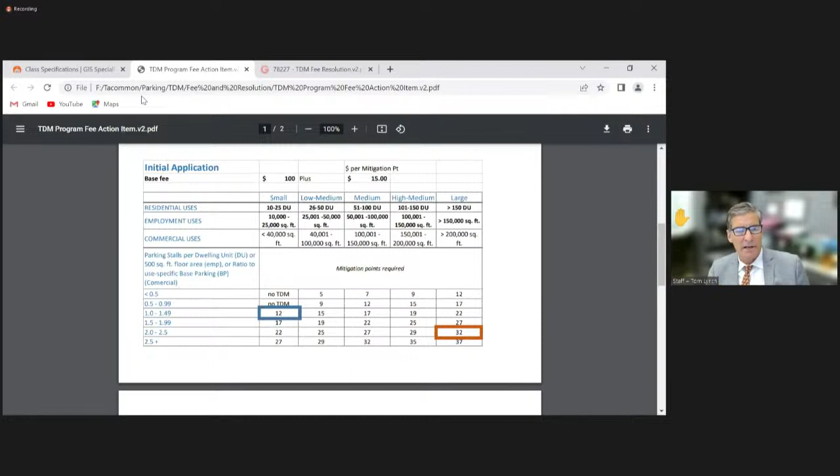Okay, yeah, I think that makes sense. I mean, in the grand scheme of things, that development cost seems relatively modest to begin with, so we don't have to worry about that level of detail. Thanks for answering that.

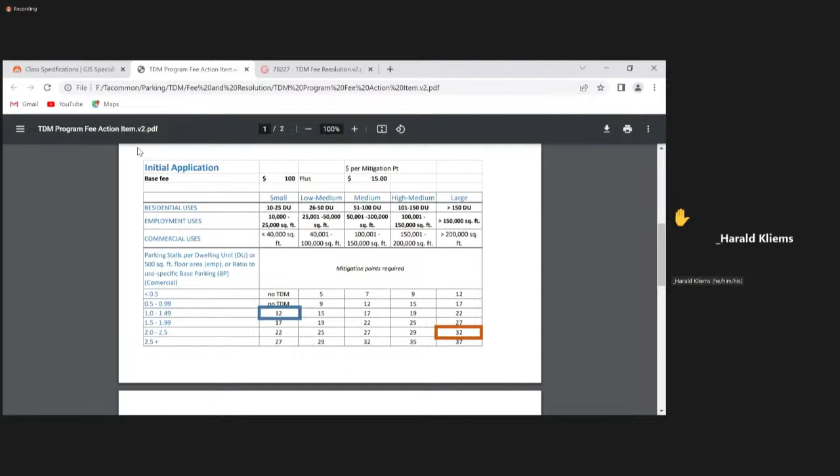And I should note, our goal is to review the fees after a year and see where they line up, so we can make adjustments as needed. Because this is a brand new program, so we're not sure what the first year will look like. So we want that ability to make adjustments on it.

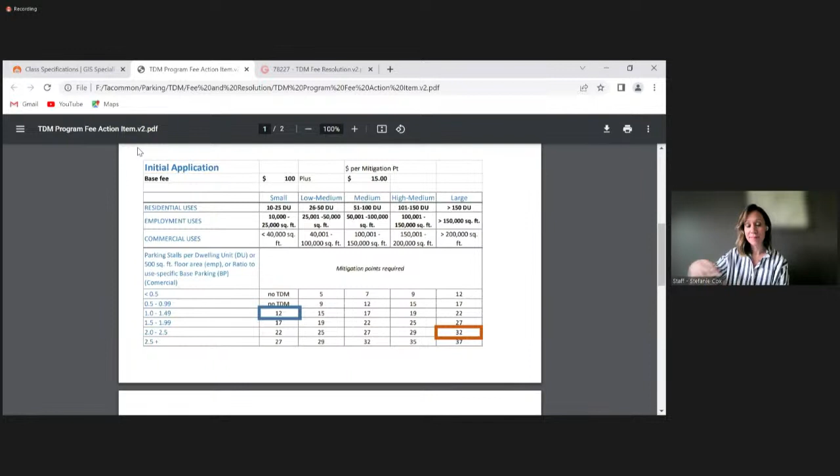Okay, and since those fees can be adjusted and approved just by the Transportation Commission, that process should be fairly streamlined, Stephanie. So, other comments or questions for Stephanie?

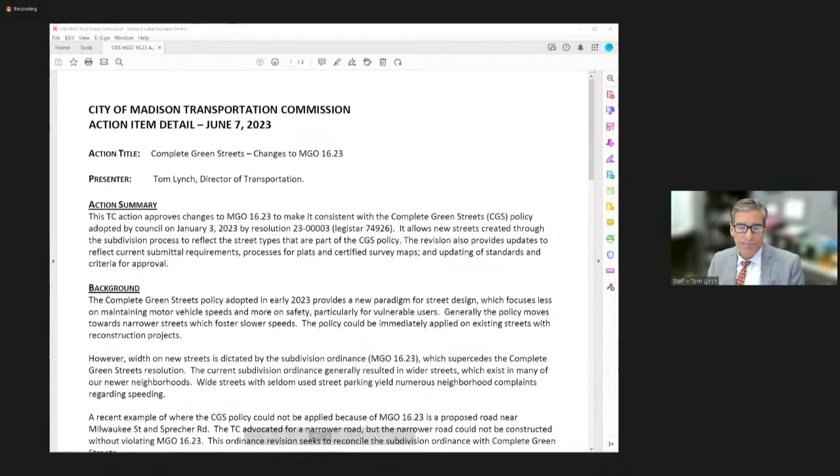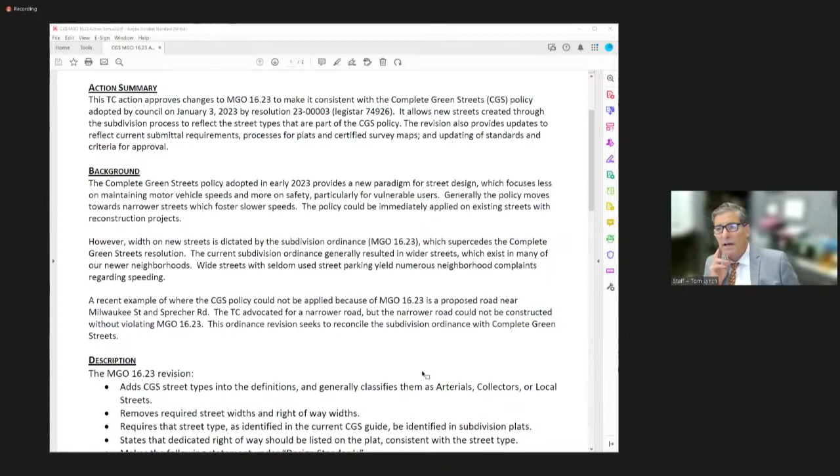And we said that this year we would deal with MGO 16.23. If you remember, just a couple meetings ago, the Transportation Commission was reviewing the geometry for a street just off of Milwaukee Street, east of the interchange. And the Transportation Commission wanted a narrower typical section from face of curb to face of curb. Yet legally, that condition couldn't have been imposed, because our subdivision ordinance is very prescriptive, saying if your right of way is a certain width, then your face of curb to face of curb dimension has to be a certain width.

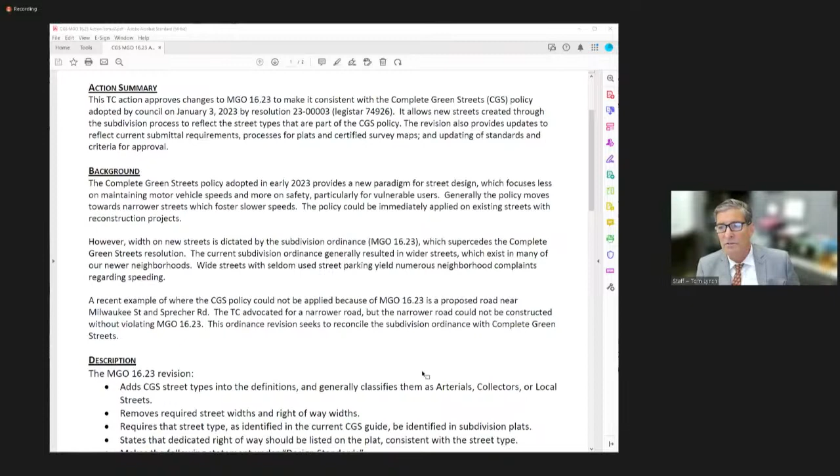Over the years, that's led to streets that are kind of almost broken when they open, because they're so wide they just encourage quite a bit of speeding.

So if we're to summarize, the 50-page revision that's being done adds the complete green street street types and the definitions, and helps classify them as arterials, collectors, or local streets, which was needed to be consistent with some of the state requirements that we have.

It removed the required street widths and right-of-way widths. It requires that the street type as identified in the current Complete Green Streets Guide be identified in the subdivision plat. It states that the dedicated right-of-way should be listed on the plat consistent with the street type. But note that if they dedicate, let's say 100 feet, that does not mandate that they put in a 50-foot face of curb to face of curb. That is left up to the typology associated in our policy.

Under the design standards, these two paragraphs are probably the most pertinent. It says complete green streets: the most current Complete Green Streets Guide shall be used to develop street type, width, and allocation of space between transportation modes. The tables guide shall be used to develop typical sections, travel way width, and total right-of-way width. For any subdivision or land division that proposes to deviate from the design standards in the guide, the Plan Commission shall consider the recommendations of the Transportation Commission before taking action. I think the state statute gives the Plan Commission final authority, so we couldn't make the Transportation Commission have final authority per se, but this codifies that they're supposed to consider what the Transportation Commission says.

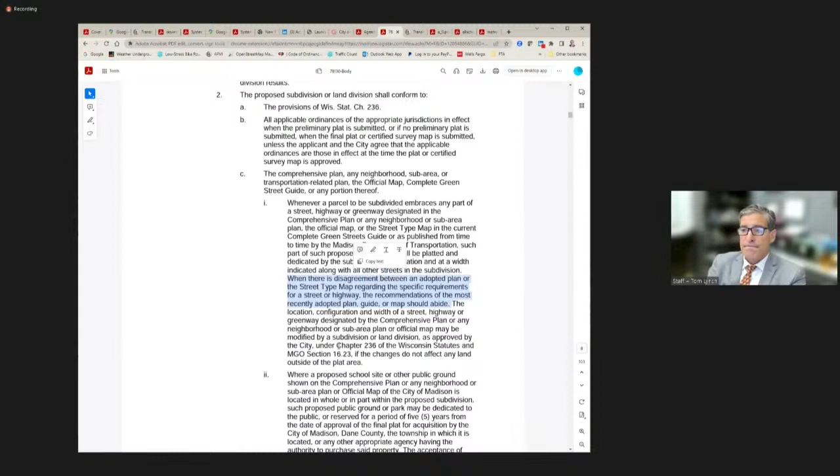So on the other hand, we have a lot of special area plans that this is superseding, right? And so now this is an overlay on top of them saying, no, you have to kind of fit into one of these categories. Okay, that makes sense. Thanks for confirming what I thought was the case.

Can I just throw something out there? Sure. Tom, what you had in your memo, the two places where the Transportation Commission would weigh in: one to offer information to the Plan Commission, and the other where just TC approval is required. So if there's a variance from complete green streets, the TC would need to get involved. So there's like a backstop.

And if it's a situation like you described and something needs to be adjusted, TC is the group that's authorized to make changes to the complete green streets guide. So it should all circle around, and TC would need to get involved, and then the discussion could occur, and it may end up resulting in a change to the complete green streets guide. So I think, Tom, this sort of ties it together, doesn't it? Yeah, we hope so. And we hope that we keep everything current, right?

But just to provide an example, Madison in Motion—when was the last time anyone looked at Madison in Motion? That's 5 years old, and yet it's still currently our transportation plan. So we don't want this to be like that, but I'm giving an example of how sometimes we forget that we did plans 4 or 5 years ago.

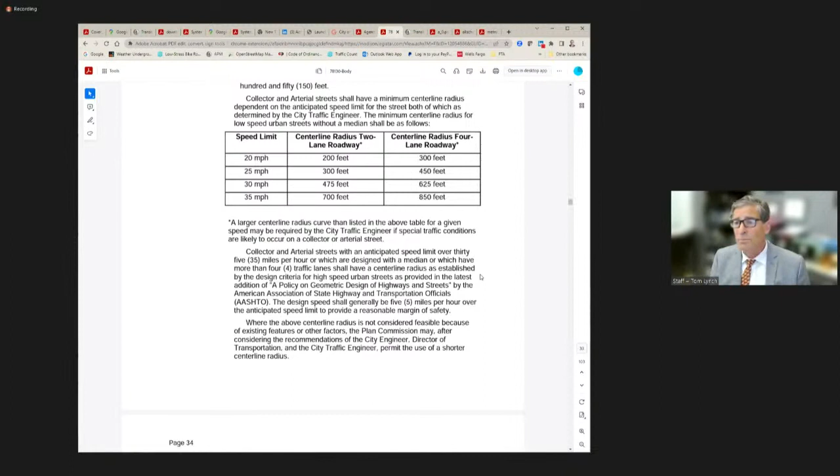For me, the question is, why are we designing for 35 miles an hour when we could be designing for 25 miles an hour? I'm kind of more in that category. Yeah, I don't... I can't think of an arterial that we would design with a speed limit over 35 miles an hour. But there could be different people sitting in different chairs 10 years from now, so I can understand your point.

It looks like Yang might have a comment there, Tom. Go ahead, Yang. Yeah, I just want to second Tom on some of the comments. I think traditionally engineers are trained to design typically 5, sometimes even 10 miles over the posted speed limit. The idea is that people are going to drive a little bit faster, so you need to design a facility that's accommodating and forgiving when people drive faster. But I think some of us are thinking differently now, whether that actually achieves the safety results that's intended.

When you design something that's a bit faster than the posted speed, people actually drive faster, and people may actually run into more issues. There's some debate going on, but from what I've seen on some of our streets, I'm leaning towards this: if we post 25 miles per hour, we should design the facility at 25 miles per hour, so we can make things as tight as possible, so people actually drive slower. There might be situations that warrant the previous practice, or a common industry practice, but I think in the vast majority of cases I've seen, I really see the benefits of designing at a lower speed, so we can realize many other benefits. Those benefits outweigh being forgiving to someone who happens to drive faster. That's just my thoughts on that.

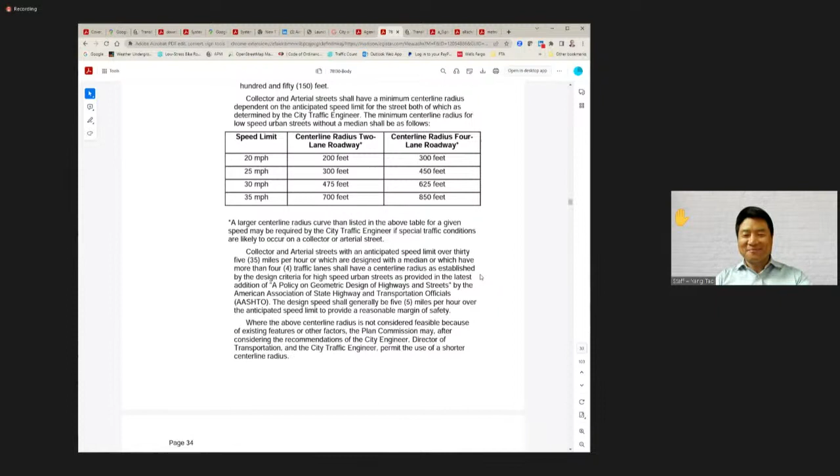That's a great question. All right, thanks. That's all I had in terms of questions.

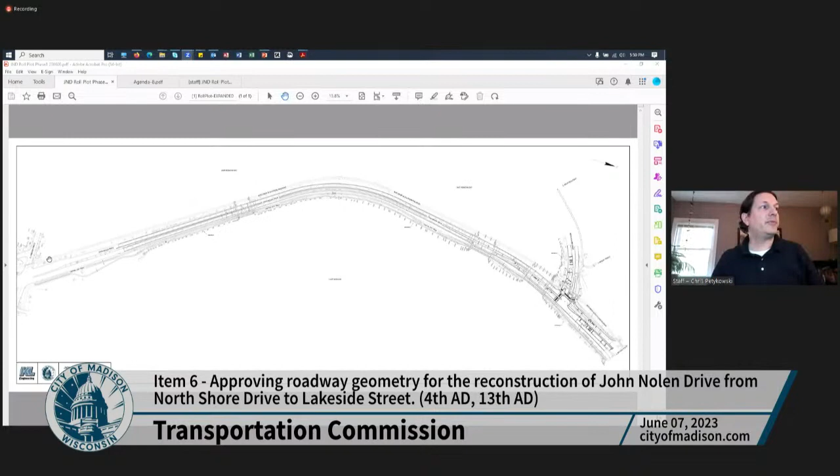So the project again is from just shy of Lakeside Street through the North Shore Drive intersection. It includes the 6 bridges on the causeway as well as the pavement on the causeway. Our cross section is...

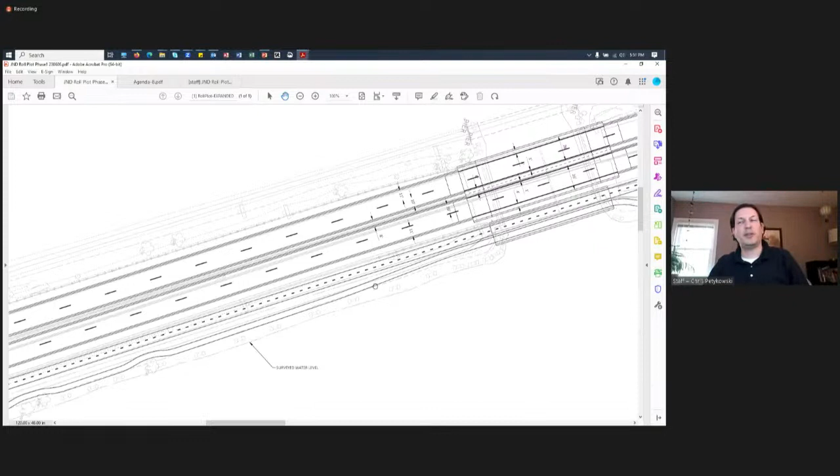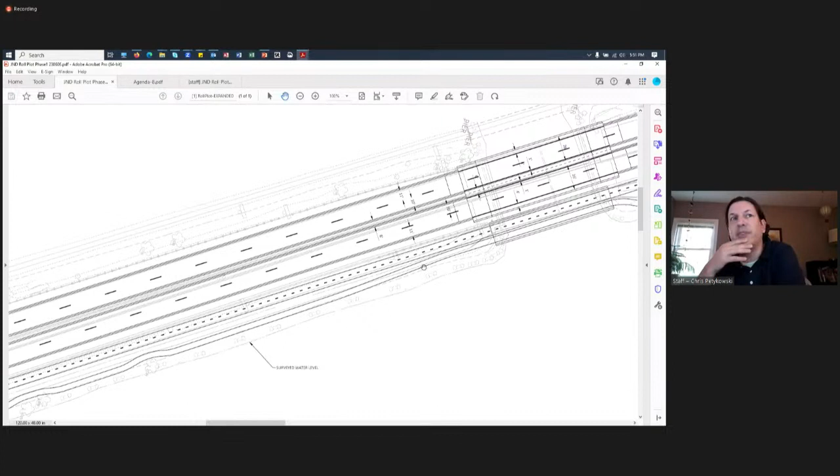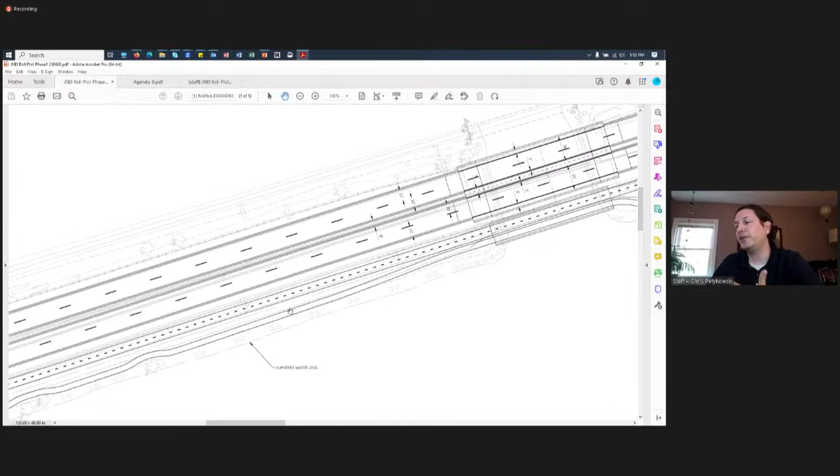We tightened the cross section and pushed it towards the railroad to provide more space for the ped and bike facilities and the future waterfront master plan efforts. It includes 1 11-foot lane, 1 10-foot lane, curb and gutter on both sides, a curbed median 8 feet wide, again two 10 and 11-foot lanes, and then our 10-foot multi-use path and 6-foot pedestrian path. In general, we aligned the bike path to be more straight and parallel to the roadway, and in the pedestrian path we suggested some variations with some gentle curves. We fully expect that through coordination with the Lake Monona waterfront plan, that sidewalk facility will probably be tweaked and may potentially be part of their project instead of the road project. So that's to be determined, but our analysis suggested we wanted a separate facility for peds and bikes, and that's where we lined that up.

As far as the bridges go, we continue that geometry across the bridges with the 10-11-foot lane and the median, and we are showing a separated bridge structure which would have parapets similar to the roadway bridge, so we wouldn't have any sight line issues. The parapets would be a normal standard height where bikes, peds, and vehicles could see over, so it wouldn't be a truss structure.

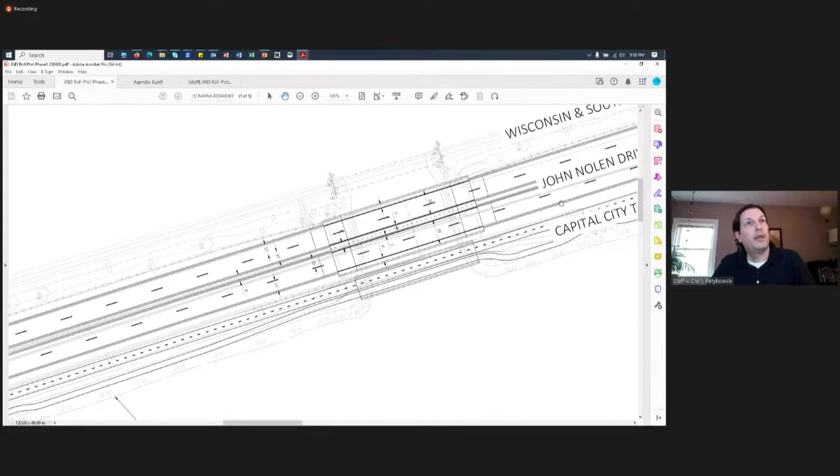That cross section continues throughout the causeway and the two other bridge sections. I'll just zoom through those.

One of the things that was tweaked since the agenda was posted was we made the island bigger, based on the feedback from the committee that folks were preferring alt two, but want to make sure the island's done correctly and effectively.

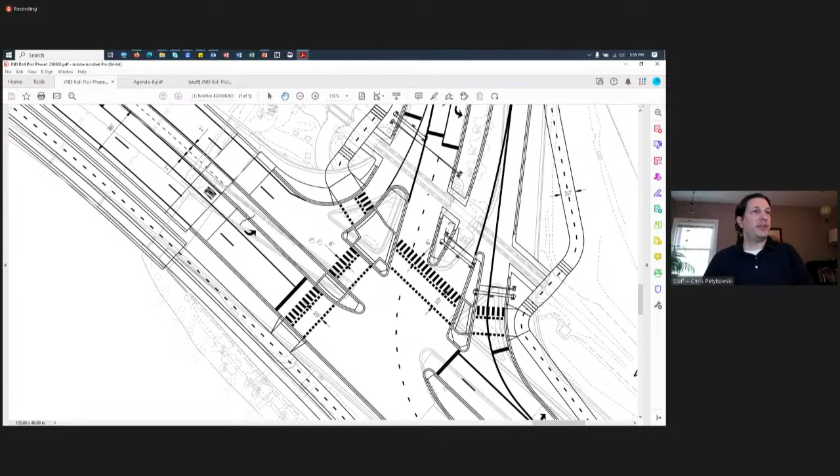Since the agenda was posted, we did change this 11-foot left turn lane to a 10-foot left turn lane to tighten that up. And then North Shore Drive currently has 12-foot lanes, and we are rebuilding the approaches. We changed that to 11s.

I think in our final design, we still want to try to see if we can make this island bigger. But again, we're proposing this kind of configuration, and we can still make some minor tweaks to the final design.

An important piece of this puzzle is the inclusion of this new path on, I'll say, the west side of North Shore, or west and north side of West North Shore and John Nolen. This is a path that does not exist currently today, and we're showing it extending to Broom Street where the sidewalk ends there, and up to the Bassett Street Railroad crossing, and then down to Bedford Street.

I also just wanted to point out that we now have all the community survey information posted on the website. A lot of that was kind of discussed before. In most cases, the community survey and the staff recommendations align, with the exception of that Alt4, Alt2.

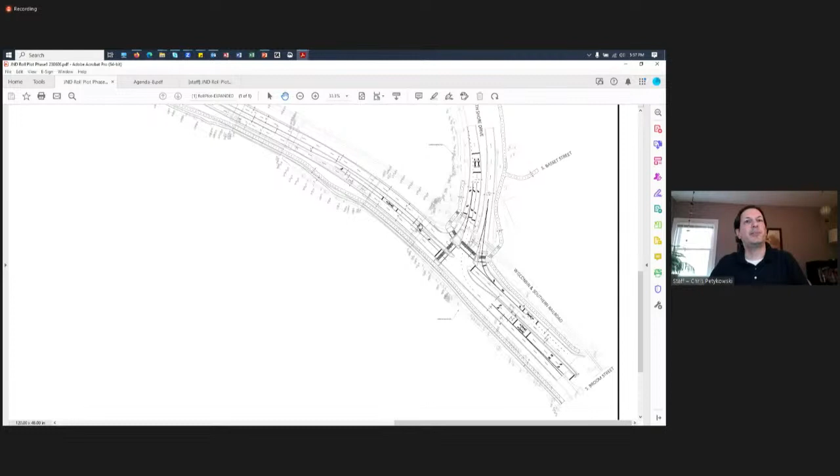And then we also have the small group focus group results on the website as well, and those all similarly seem to align with the staff recommendations as well. So I know we've talked about this a lot, so I will probably stop at this point and then ask if folks have questions.

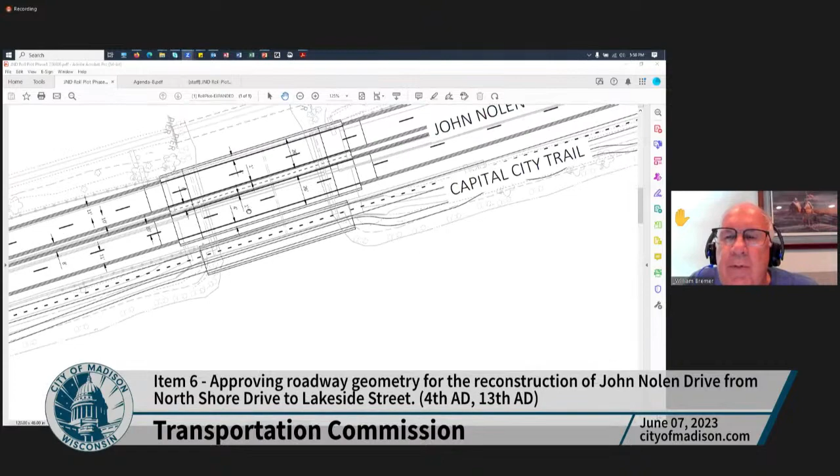Bill, go ahead. Thanks, Chris, could you show the bridges again, the cross section of the bridges? You bet. Did I see, is it 26 feet with the 11 and 10 lanes? Yeah, is that right? Yeah.

So then the remainder is buffer space between the little shoulder space. Yeah, for the bridge rail. Yeah. I don't want to call it a shoulder, I call it a buffer. Okay, yeah, shoulder space.

Yeah, so that is below the recommendation for, I believe we were requesting, by doing this, we're requesting WisDOT to take 3 feet out of each side of the shoulder, or 3 or 4 feet, to tighten that cross section up. And that will definitely slow traffic down. I think that'll be one of the points where traffic will, the narrowing of the bridges. Yeah, okay.

I just wanted to make sure you had what you had for a buffer. Sure, that's good. Great, thank you. Okay, thanks, Bill. Darren, go ahead.

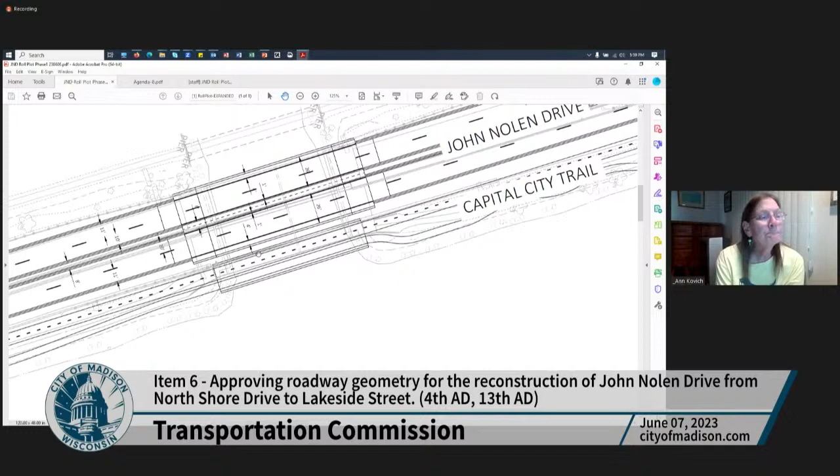Yeah, thanks, Ann. Chris, going back to North Shore Drive and that intersection there, you mentioned that you took the travel lanes down from 12 feet to 11 feet. Is there a reason why you couldn't take them to 10? We could probably do maybe a 10 and 11. We do have to keep 11 for this, since this is state highway 151 for the trucks, but we could consider maybe a 10 and 11. Yep, I'm just always a fan of the narrowest lanes we can possibly get, just to help slow traffic down. Yep, let me write that down.

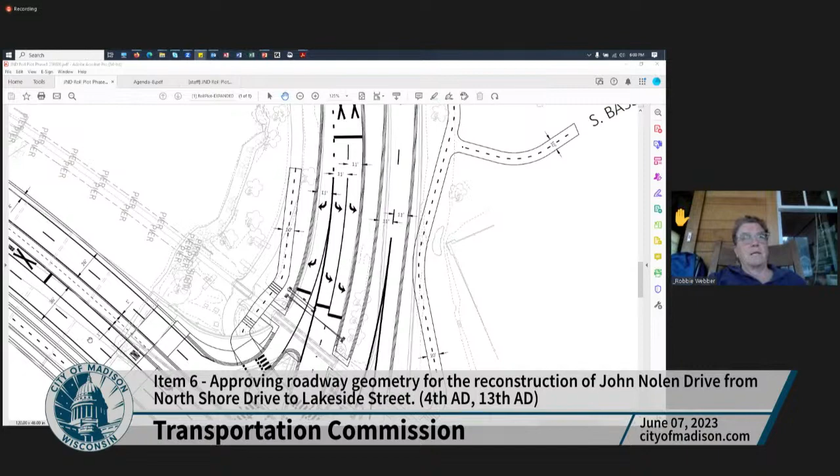Yeah, so I have a couple questions. First of all, the 10-foot path that runs parallel to John Nolen, is that as wide as we can get that path? I know we're going to have a separate pedestrian path, but with the volume of traffic, that seems like the bare minimum, I guess I would say. So I'm wondering, maybe our paths are standard 10 feet, but it just seems with the volume of traffic we might need a little more space there. If it was possible to get another foot or two.

It certainly is possible. One of our cross sections was like a 14-foot cross section, but we felt by providing that separate space for the pedestrian, and still trying to keep in mind overall reducing our pavement widths in general, having the 10 feet just for the bikes and then 6 feet for the peds could work here. But it could be bigger. Yeah, it's possible, it just takes more green space.

I realize it's a trade-off between green and pavement, but I am just worried that with the number of bicyclists, it certainly doesn't allow people to ride side by side, and even passing maneuvers can be a little tight there. So I'm just kind of throwing it out there. I do realize it's a trade-off, so maybe I can also hear what other people on the committee have to say about that. But I think 10 feet might be kind of squeezing this area. I do have a couple other questions though. So I'll just throw that out, Renee there might want to weigh in on that.

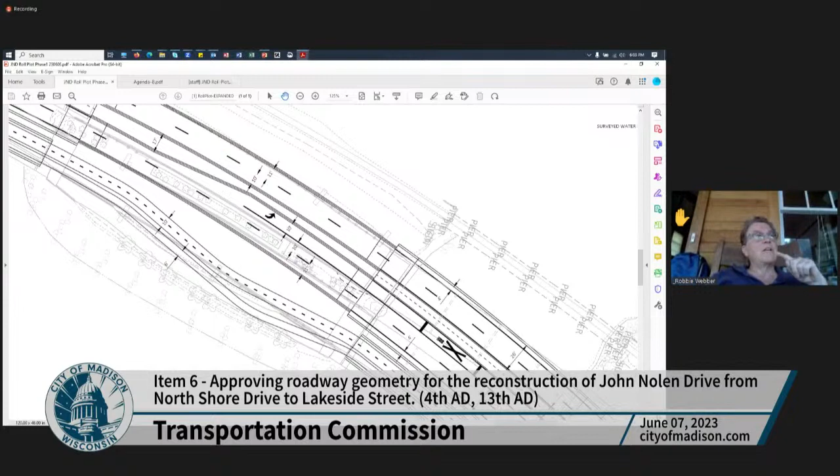Okay, well going back to our favorite intersection at North Shore, I just had a couple of quick questions about that. At the last discussion, did I hear that people coming from Brittingham Park or from the lakeside would be able to make the full transition in one cycle without standing on the island? Ideally the lights will be timed so they'll be able to get all the way across without having to stop on the island?

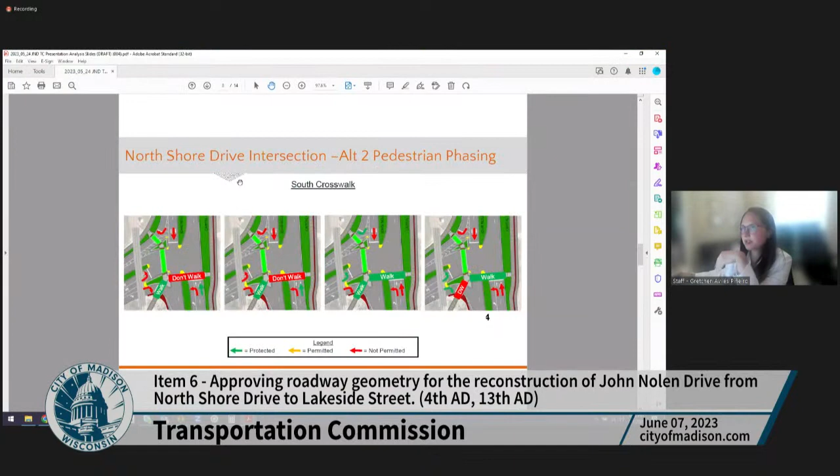Yeah, okay, so this is a sequence of how it would look for pedestrians and people riding bikes crossing from the park to the lake or from the lake to the park. These are the different times during the cycle where pedestrians and bikes would get either a walk or a green for the bikes to move from the corner to the island and from the island to cross John Nolen - this is the south crosswalk. So there are multiple opportunities for making the crossing from the corner, from the park, to that bigger island. And then there is one point during the cycle where both pedestrians and bikes will be able to make that full crossing in just one phase. But yes, we do have multiple opportunities for people to get to and from that pork chop island and to cross back to the corner where the park is or to the lakeside.

So we have the opportunity for people to get into the islands, and then they would be able to make that crossing across North Shore, and then again be able to get out of the islands. Later in the cycle, we should be able to provide opportunity for people if they got stuck on the island and weren't able to get out, or if they're in the corner and want to move to the island. So there will be multiple opportunities.

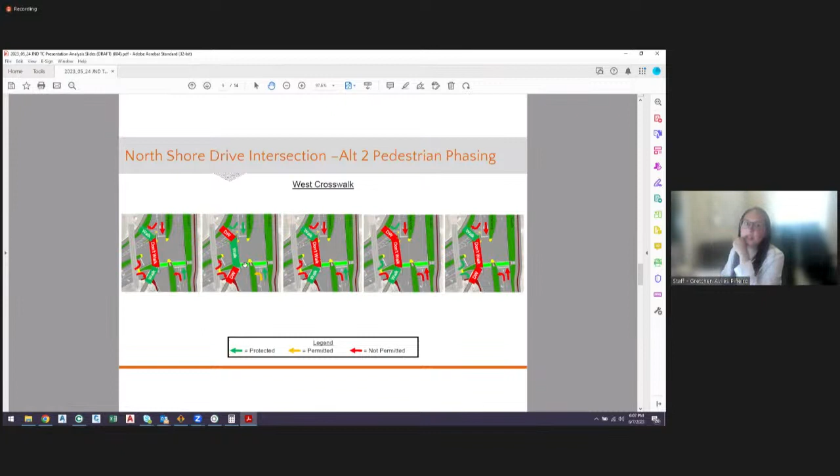It won't be a long time, but the timing—for example, here the walk is green, so you would go to the island and then be able to cross North Shore. The time that walk is going to be on is longer than what it will take you to get across there. So there will be some waiting at the island before you'll be able to get another green or a walk to complete that crossing and get to the other side.

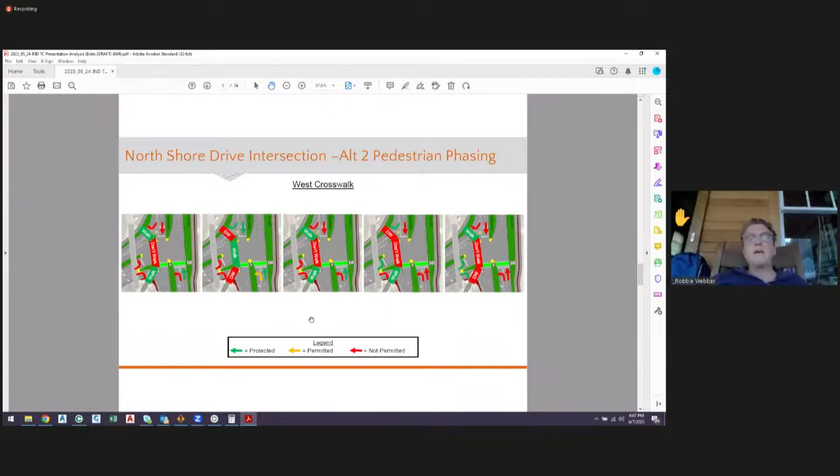Okay, so I don't know whether this West Crosswalk is going to get as much traffic as the one coming from Brittingham, but my concern is that the cycles are going to be fairly long, and I'm wondering how long out of that long cycle will be the time when you can get all the way across without stopping on the island.

Right. So currently the longest full cycle we have is 110 seconds—almost 2 minutes. And if I did some timing to see adjusting it to what the future would be, but still maintaining that full cycle, because we still have to coordinate with Broom that's really close by.

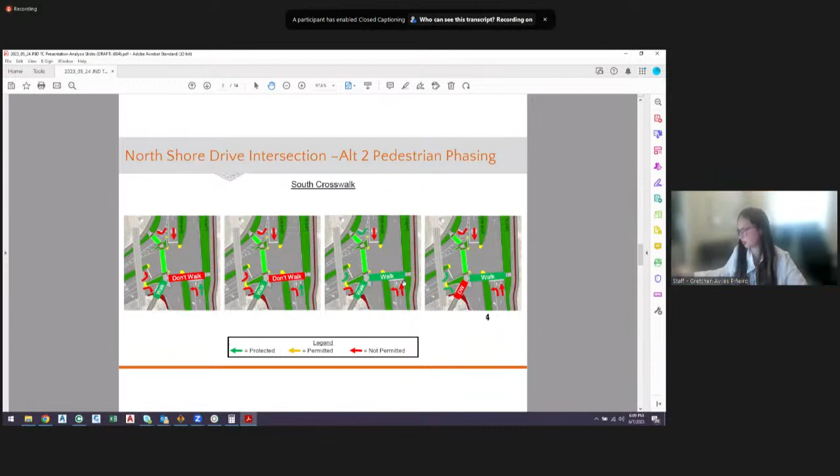Here in the south crosswalk, I would say that this walk right here, you wouldn't be waiting much. I'm interested in the third panel—that one, this one right here. Yes. Okay, so this one should be pretty good and easy to make this crossing. So this is the south crosswalk.

That's not my question. My question is, out of that 110 seconds, how long is it that you will be able to get a full walk both directions across? Got it. Okay, so we have here, they have it as phase 7.

So that is crossing 2 and 1 green, the full—so it would be at least 36 seconds. It should be enough easily for a bike to be able to get across. And for the pedestrians right here...

I think, according to the timing that they have, it would be phase 7 and 4, and I'm just double checking with another file that they have that actually has the timing, so I want to make sure I give you the right information.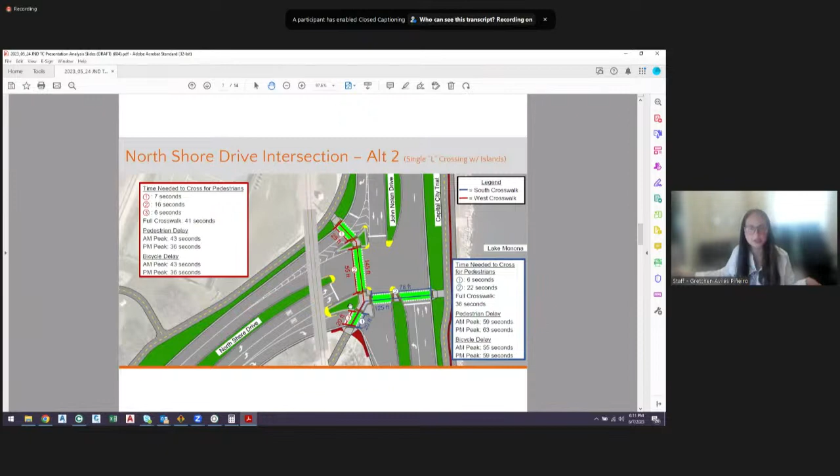And this is... yeah, so if I do this math real quick, yes, it should be about—for that full crossing—about 38 seconds. So it should be enough according to this map that they have right here. It should be enough for a pedestrian to get from one side to the other, in that third quadrant we're showing right here.

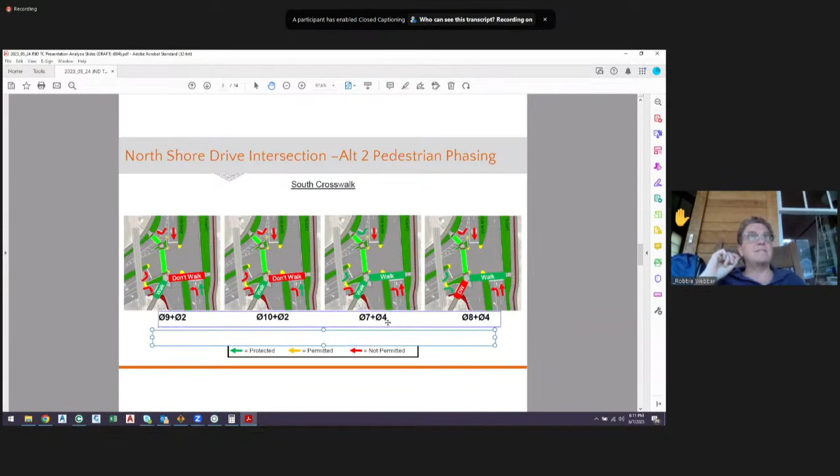Let me explain why I'm asking. My question is not so much whether people are going to be able to make the crossing physically—that's not the issue. The issue is how long people are going to be standing on the island because they don't have a green in both directions. This gets back to the size of the island and the capacity of the island.

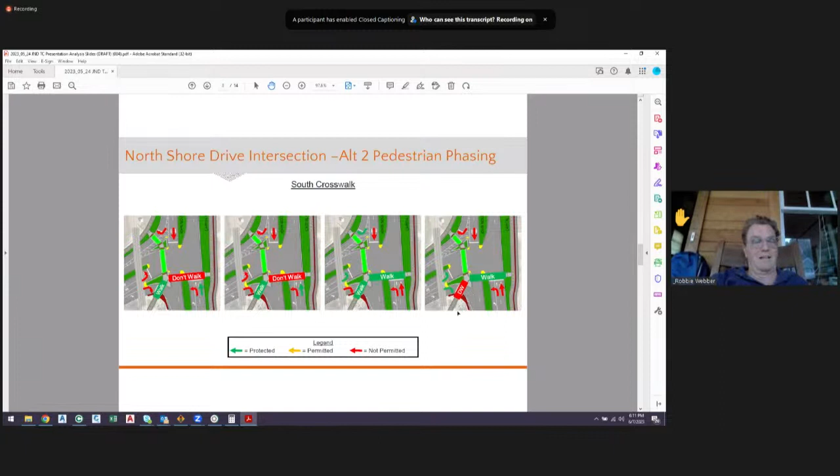Because we are going to be seeing a lot more people biking—we already see a lot of people—and I am concerned about the capacity of the island when people do not have a walk going both directions. That's why I'm asking, out of the whole cycle, how long people are only going to be able to get partway across. Okay, so it's a capacity of the island issue, not a can-you-physically-get-across-once-you-get-a-double-green issue. Yeah, and I see that.

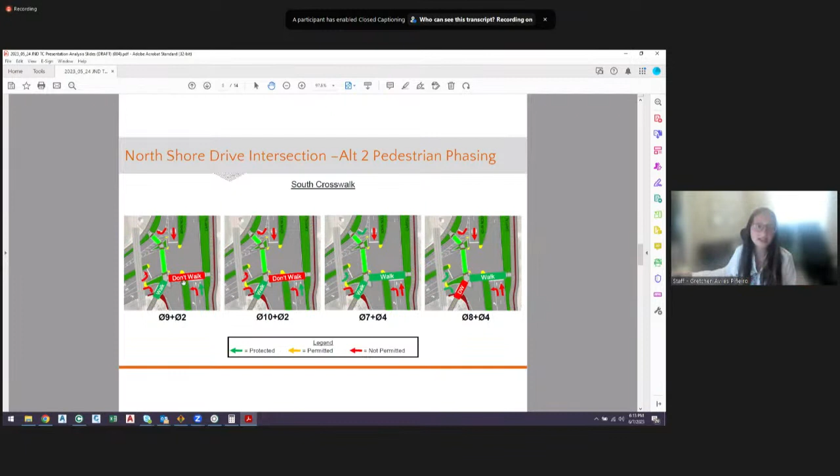That would be an issue since we have so many opportunities for people to get onto the island, opening a gap where more people could crowd the island during more times in the cycle, rather than giving one option to cross with no more options. But the more options we provide to get in and out, we're also providing more time to fill up those islands. That is correct, yes. But I can tell you that I blow right past the island. I don't even get onto it if I can make it coming from the lakeside, because it's too crowded right now. So if I see nobody coming through that slip lane, I'll go around the nose of the island and not even get onto it because there are just too many people.

I'm just bringing this up because when we're rebuilding, I don't want people hanging out in the slip lane or trying to run the stale green because there's no space for them to stand on the island. This gets back to Chris's concerns about the size of the island. I'm just throwing it out there that I think we're still going to have an issue. That's my concern.

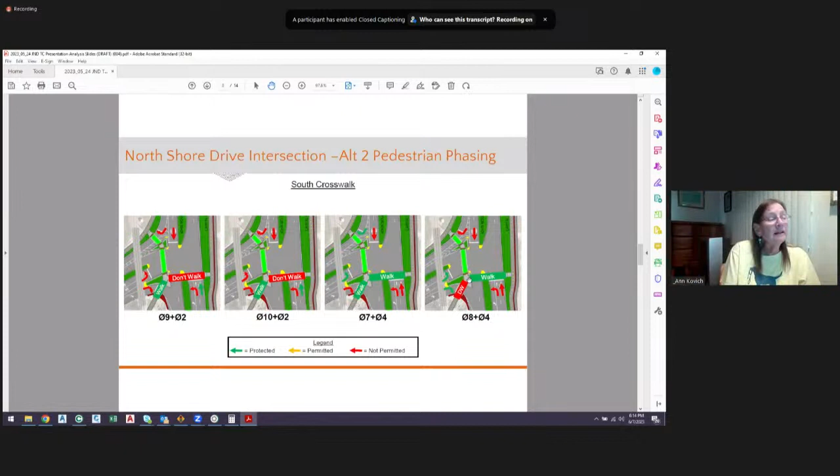Did the increase in the size of the island help that at all, Robbie? Well, any increase in the size of the island is going to help, and yes, the increase we've already seen did help, but it's still too crowded. Especially because this isn't a straight crossing—the Monroe Regent crossing is much more a straight line. When we rebuild this, we're making people make close to a 90-degree turn on the island to get across from Brittingham Park to the lake or the other way around. That means people with larger bikes also need that turning radius, so they'll be taking up space. There's a bunch of people crowding on the island, all trying to get across and in and out of the crosswalk.

I do think expanding the size of the curb cut is going to make a big difference. That's a very good change, because it will give people more space to pass each other. Right now you really can't pass each other in the curb cut, going in opposite directions. So I'm just throwing it out there that I think we may still have some capacity problems for non-motorized transportation in this quadrant. I have one other comment, and then you guys can chat about what I brought up.

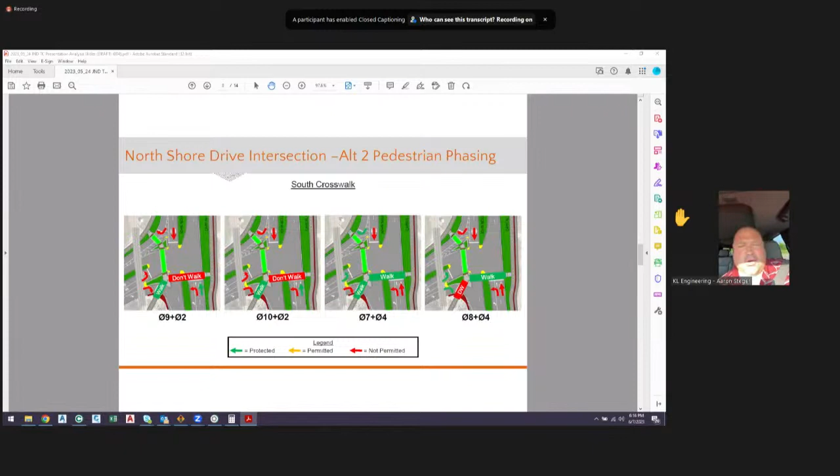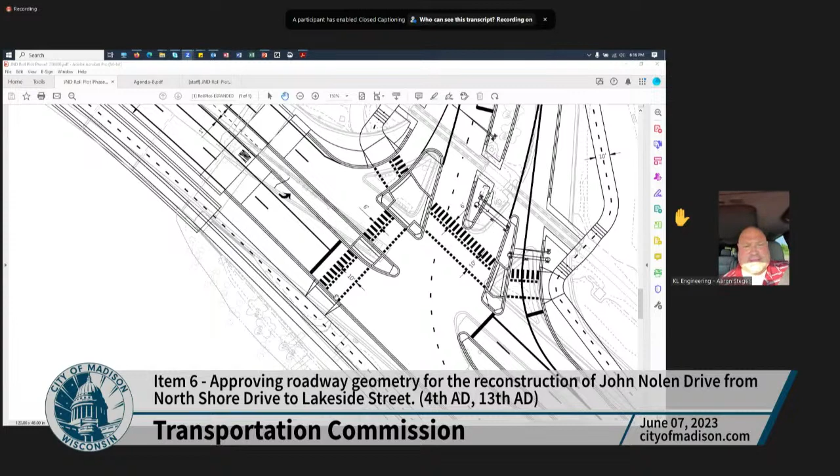It may not be a direct answer, but I think there's one other important factor to consider—it's not only the size of the island, but also the distance across John Nolen Drive. If Chris could pull up the drawing again, you'll notice how much shorter it is to go from one side of the island to the other side of the street. That also makes the crossing much more efficient and safer, because you're no longer in a vehicle pathway. Just to see where the crossing would be today versus how it's proposed—when you make that distance shorter, not as many people will need to stop on the island, because they'll be able to complete that crossing in one maneuver.

The old distance is from these gray lines here, right? And then the newer, shorter stretch is what Aaron's getting at. Okay.

I have trouble figuring out how it's going to work just looking at the geometry—I'm just not able to picture what it's going to feel like. But I'm bringing this up because I think crowding on the approaches, even people turning off the path and waiting to cross at the light, means having a staging area for them on the lakeside as well. We kind of solved that at Blair, but that was a huge issue there too. So we just don't want people waiting in the flow of traffic, whether that's other bicyclists or cars.

Robbie, I see Yang has his hand up. Yang, did you have some comments here? Yeah, thank you, everyone. I think this is a very good discussion.

We already have been discussing that we should maximize the curb cut as much as possible, even looking to increase that further to maximize the usable space in that area.

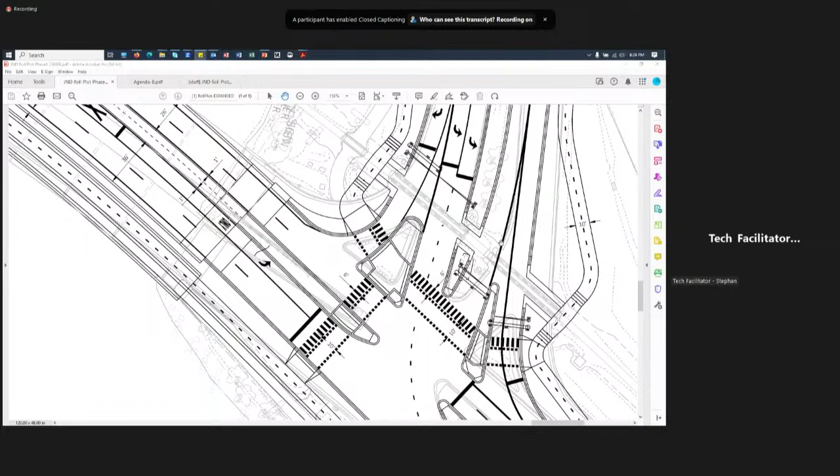Thanks, Ann. Robbie's questions on the light timing just got me thinking. In planning out the timing of the light, what consideration is given to people who move slower than a typical able-bodied 35-year-old, whether slower on their own feet or slower because they're rolling with a mobility device of some type? It's from recent experience I had in La Crosse on Rose Street, getting caught in traffic with somebody on a scooter and a power wheelchair, which made me realize how much slower they move. As our population is getting older, this is going to be a spot enjoyed by many, not just people on bicycles or younger people who can move 2 to 3 miles an hour walking. What consideration is given to crossing for the slower movement of people?

Who wants to take that one? I can start. Normally what we use is 3.5 feet per second to calculate how much time we need. But we do know that there are certain areas and locations, and sometimes we just know from feedback from the public where more time is needed for certain crossings. So we definitely take a look at that, and also when we're evaluating crossings for schools, especially for the crossing guard studies, we use a lower speed. So there are certain locations and applications where we use a different speed to calculate how much time is needed. I don't know if Renee wants to add anything to that.

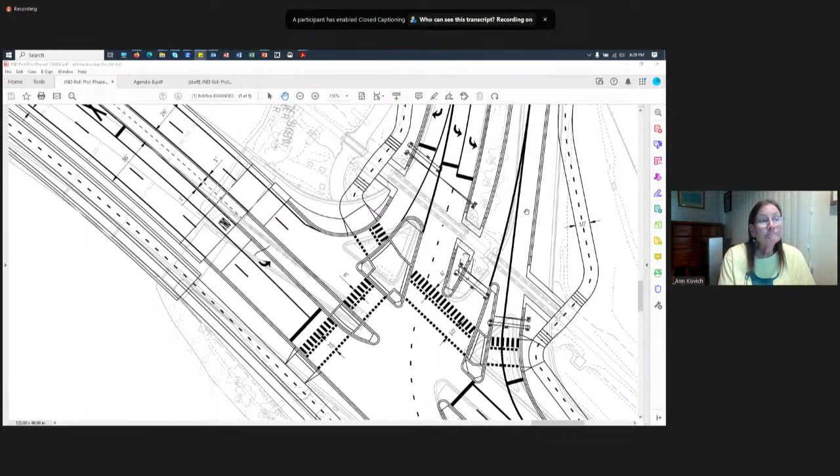Chris? Yeah, I think, as I mentioned last time, staff saw the pros and cons of both options, and we were okay with both options. We could move forward with both options. But given the full scope of all the considerations, if we had to choose one, we would have chosen alt 2, and I still believe that's true.

Okay. And is that true for everybody on the call? I don't know, people should feel free to speak up or not. I guess I'm genuinely wondering.

Okay, is that all you had, Harald, before we ask other folks their thoughts? I have a couple additional things. Sure, go ahead.

So the staging area on the south side of the John Nolen Drive crossing, I think we need to figure out a way to make that bigger, to have more space, because it's going to be wider, which helps to some extent. I still think with a 90-degree angle, you have a lot of space that's actually not useful. So thinking about how we can make it so people waiting for the light do not block the path or have enough space there. That's just a minor thing we can probably sort out.

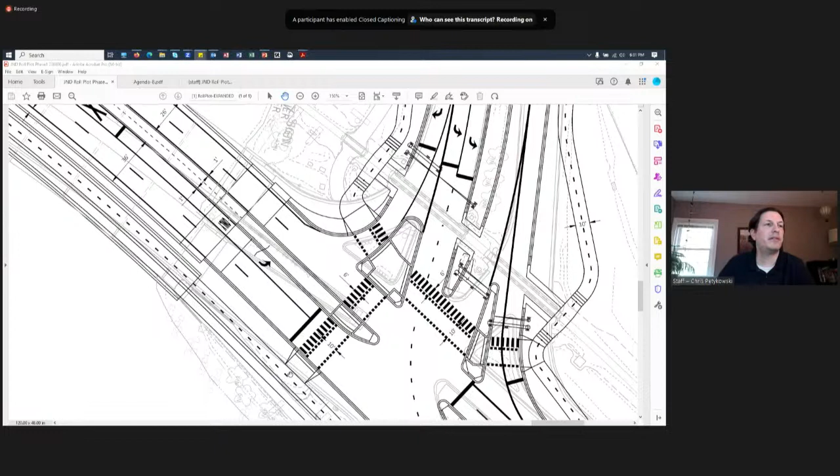I noticed that compared to... did somebody want to respond? I was just going to say, yep, that's on our to-do list. I think we'll bow this out a little bit, make a little more space between the path and the crossing, as well as widen some additional storage space on each side. Right, because people from the walkway also need to get across that crossing, and right now you have that little buffer in between, so maybe that's where the two join. Yeah, I think that sounds good.

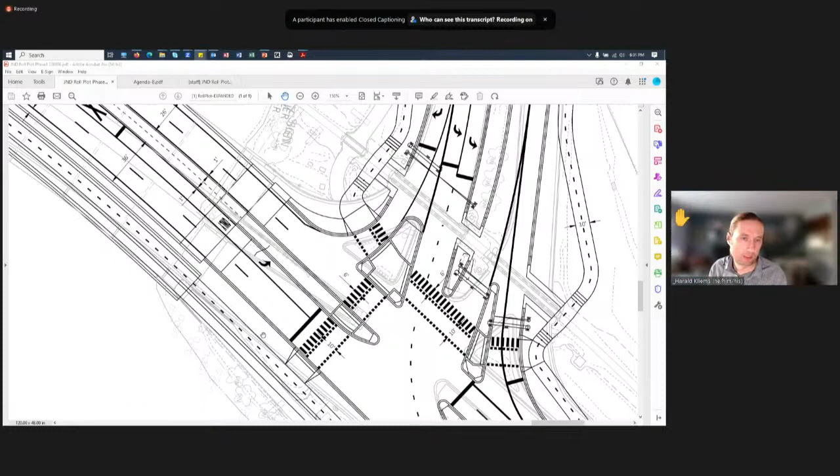We had a discussion about the width of the path along the causeway. I get the conflicts with trees and other things. I looked at NACTO guidance for two-way cycle track, which I guess this is not exactly, but I think it is in a way. They say recommended is 12 feet, which sounds better than 10 for me, and this may still be narrow enough to allow all the other things. I know in the master plan process, noise was a big concern, so having the ability to get trees in there and maintaining the distance between cars and people walking and biking, I think that's good.

So finding that balance is good, but 10 feet is what it is right now, and it does not allow people to ride side by side. It creates conflicts between people riding at different speeds, even when nobody's walking. Pedestrian traffic is often not very heavy, but it still seems too narrow. Since we're not going to be able to change that in the next 50 years, most likely, erring toward 12 feet seems better.

One difference I noted between what you presented last time and this drawing: it seems like you made the path approaches along North Shore Drive across the railroad tracks at 90 degrees, where previously they were going through at an angle. I think the downside, especially on the upper left corner, is that you now have that 90-degree bend in the turn right after the ramp to the crosswalk. Yeah, right there.

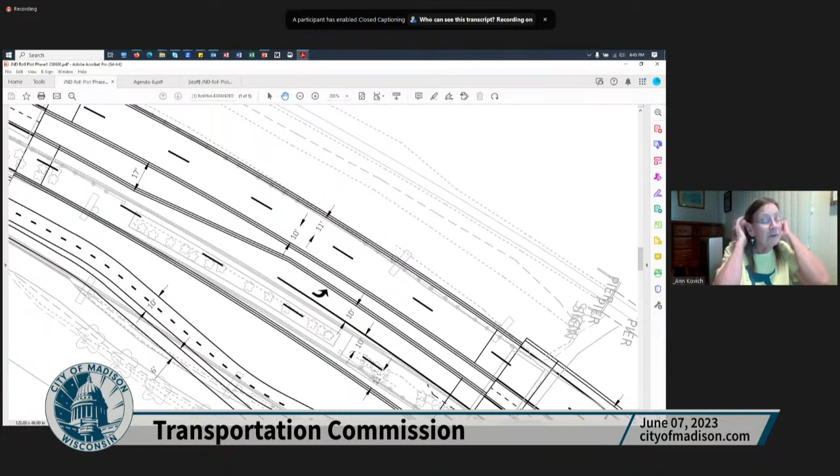Okay, you want to start that motion over? Sure. Well, I just want to make sure that we're all on the same page, because it sounds like we were on a little bit of a different page in terms of the width of the car lanes. Yeah, I withdraw that. Let me make another attempt. Okay.

So I will move approval of the geometrics as presented, with the recommendation that the bicycle portion of the path along John Nolen be widened. Okay, I'll just leave it at that, and then if we can get a second, I can discuss the other possible amendments.

Is there a second for that motion, for discussion? Darrin, is that a second? I second the motion. Okay.

So if I can speak to it, I know that there was some question about the 90-degree turn just before the path crosses the railroad track in the North Shore intersection. And if someone wishes to suggest that be straightened out, I know that Harald was concerned about that. We can add that as a friendly amendment to the motion. But if everyone is happy with the answer they got, then we'll just leave it the way it is. So I will put my motion out there, and then if people want to make an amendment, we can do that.

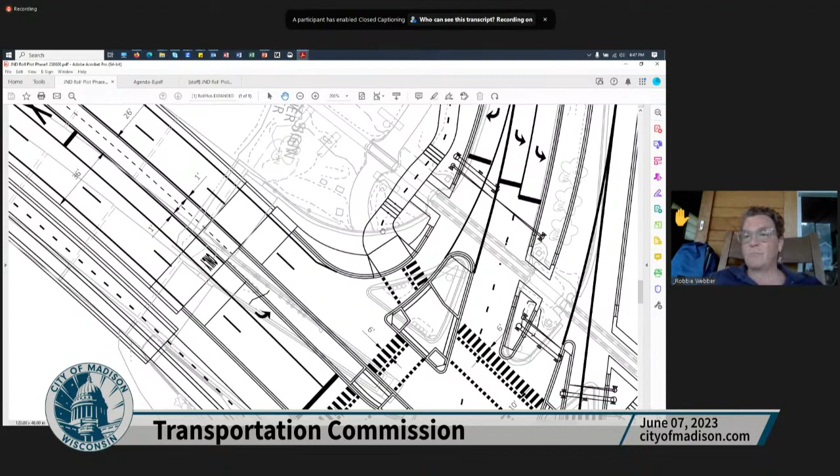Okay, what I have is Robbie moved approval of the geometrics as presented, with the recommendation that the bicycle portion of the path along John Nolen be widened. So, Chris, that gives you some flexibility in terms of how much wider. Did you wish to speak any more to the motion, Robbie? Not at this time. Okay.

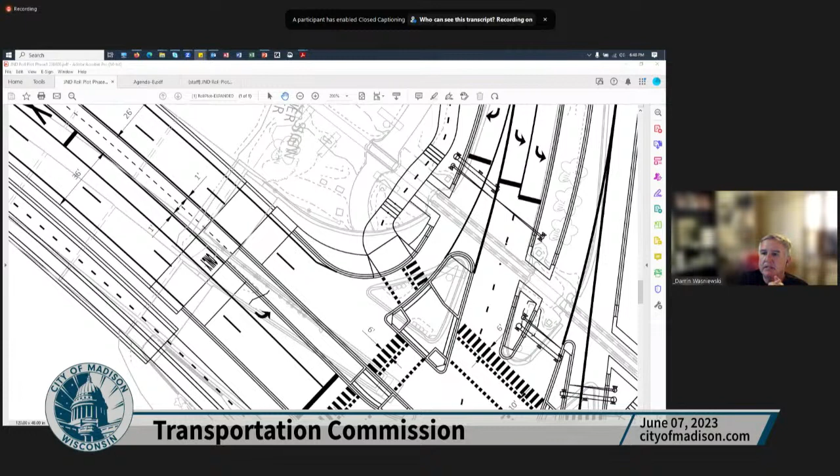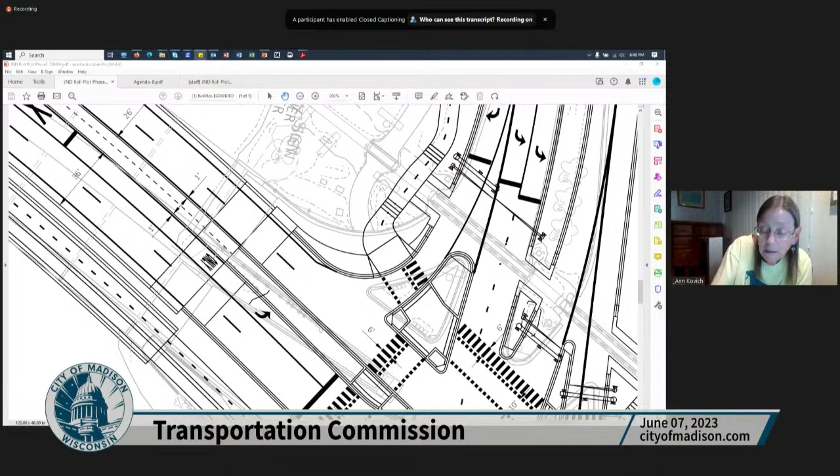All right, Darrin, go ahead. Yeah, I guess I was just hoping maybe to amend the motion to include what Robbie said, and then to add exploring narrowing the one lane on North Shore to 10 feet, if applicable. That would be friendly. So reducing the width of the car lane on, help me, Chris. It would be to have 10 and 11-foot lanes on North Shore Drive. Perfect.

Okay, just a second. So we would add having 10 and 11-foot width car lanes on North Shore Drive. Is that right? Yes. Okay, and Darrin, I think you also wanted to help straighten out that path. I don't know. Straighten out. So that would be like straighten out the path in south. Well, hang on a sec. Darrin, did you want to do that? I thought you just wanted to widen the car widths. Did you want to also straighten out the path, Darrin?

I was just concentrating on the car width, but we can explore. I know we had conversation, I think it was Harald who talked about straighten it out, but let me repeat where I think we are at the moment, and then we'll see where we go from there.

Move approval of the geometrics as presented with the recommendation that the bicycle portion of the path along John Nolen Drive be widened, and recommend 10 and 11-foot width of the car lanes on North Shore Drive.

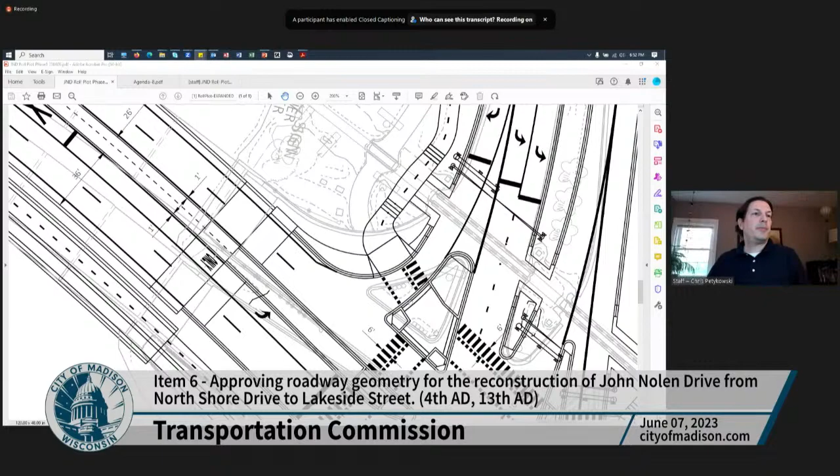I know we talked about this one. Are you thinking something along the same lines on the other side, or was it? Yes, it was plural, so I was assuming both sides. Is that right, Harold? That is correct.

One I think is more important than the other, but there doesn't seem to be... Gotcha. Okay, I'm going to read it back and see where we're at.

Move approval of the geometrics as presented with the recommendation that the bicycle portion of the path along John Nolen Drive be widened, and recommend 10 and 11-foot car lanes on North Shore Drive, and recommend that the usable space on the islands be made bigger and the approaches across the railroad tracks be made more straight.

And we're not going to critique grammar at all, we just are going for clarity here. So Robbie, Darren, and Harold, does that reflect everything correctly? And Chris and Gretchen and Yang and Renee and everybody, does that? Okay, I'm with you. Robbie, go ahead.

If I could just say, I think that saying the approaches being straight is not necessarily clear because right now they're 90 degrees, which would seem to be straight. But I think what Harold's trying to get at is that we want the path to be straighter, more direct.

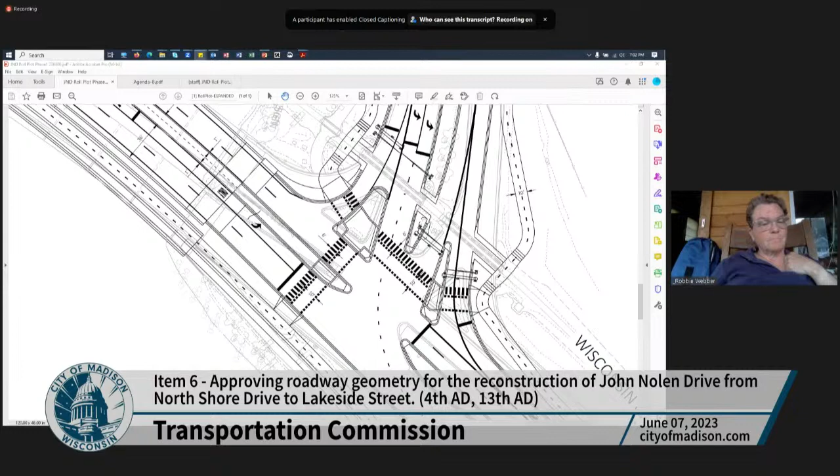Recommend the staging space at the east side of the crossing of John Nolen Drive be made bigger. Robbie and Darren, are you doing that still as further clarification that's acceptable to you both? That is friendly to the maker. Darren? Yes, it works for me. Thank you.

I'm going to read the whole thing one more time. Move approval of the geometrics as presented with the recommendation that the bicycle portion of the path along John Nolen Drive be widened, and recommend 10 and 11 foot width car lanes on North Shore Drive, and recommend the usable space in the islands be made bigger and the approaches across the railroad tracks be made more straight, and recommend the staging space at the east side of the crossing of John Nolen Drive be made bigger.

Other comments? Chris and everybody on staff still okay with how we're describing everything? Yes. Okay. Additional discussion. A lot of really great input, everybody. Okay, there, I just read it. Do I need to read it again? Or is everybody good? Okay.

Going to assume unanimous consent vote for our mega motion, unless anybody wishes to vote no or abstain or have a roll call vote. Harold? I would like to abstain. Okay, anybody else? Denise? Yeah, and I'm gonna abstain as well.

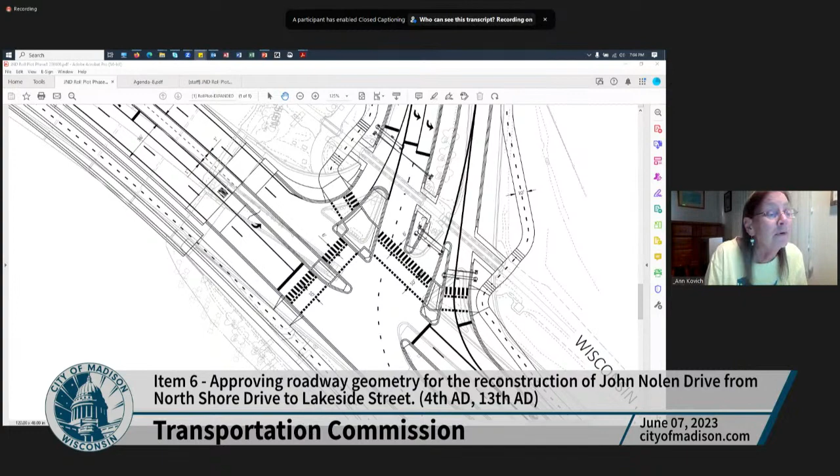Okay, let's see, we have just a second. I'm going to do my count here. We have 1, 2, 3, 4, 5, 6, 7. Let's see. So I believe we have 7 people here. Aiden, are you still here? Is that right? We have 7 members here at the moment. Did we lose Aiden? Am I counting right, Aiden, that we have, let's see, 1, 2, that's good, 1, 2, 3, 4, 5, 6, 7. So there's 7 of us here.

Okay, so with 7, we need 4 votes to pass. So Harold abstains and Denise abstains. Then we would have 5 with me not voting, we would have 4 people voting, and so the motion would be carried. I would vote in favor if I needed to, but in any event, with 2 people abstaining, the motion carries. Okay. So I will work with Aiden to, I'll probably write, I may even just type that up right after the meeting just because, you know, so I can keep read my notes and make sure I got it all exactly right. Okay, thanks everybody. A lot of really good discussion.

Chris, Gretchen, Renee, Yang, anybody have any other, Erin, anybody have any other questions before we move off of this really good discussion? Okay, thanks everybody. Now we're going to move on to item 7, which Bill asked, it pulled off the consent agenda.